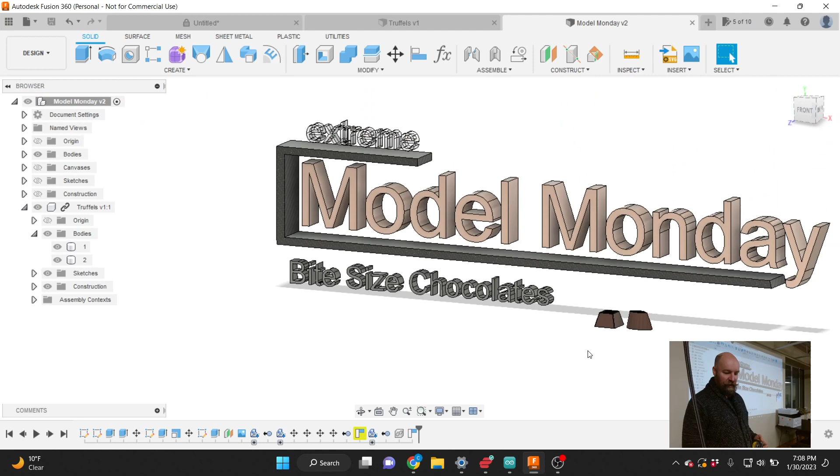Because I know we got some new people here, as an overview of the drawing environment, I'll go over this briefly. We've got a screen that we will fill with models. In the top right-hand corner there is a navigation cube, and if I hover my mouse over it, things turn blue. Anything that turns blue I can click on, and then it just spins around to look at that view.

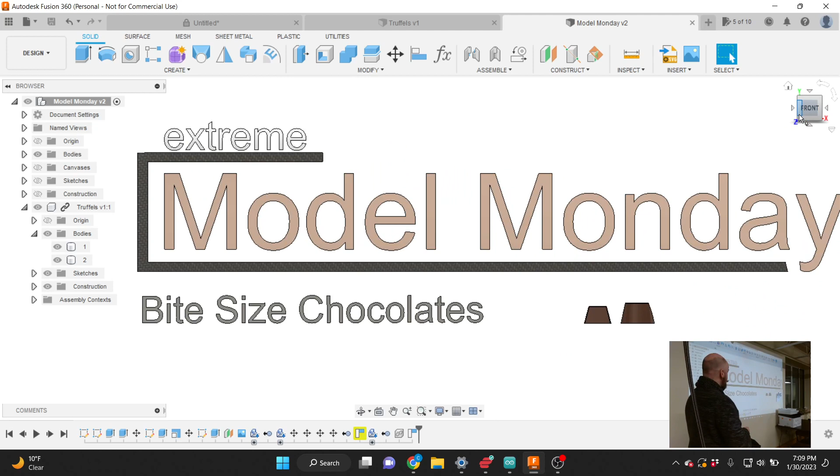I can also click and drag on that navigation cube in the top right-hand corner, and I move around in a little bit more finite way.

Down at the bottom are a handful of tools. I'll be honest, I don't use these tools very often, mostly because the first 5 tools there I can do with just my mouse or the navigation cube.

So this first tool is the orbit tool. This orbit tool does basically the same thing as the navigation cube, so I can click and drag and twist and turn my model around. When I'm done using a tool, I'm currently holding this orbit tool, and if I hit the escape key it'll put it away, and then I can do whatever I want.

I'm not seeing that at the bottom of my screen. You have a blank screen that's not full. Try making it full screen. I bet it's just clipping off. There we go.

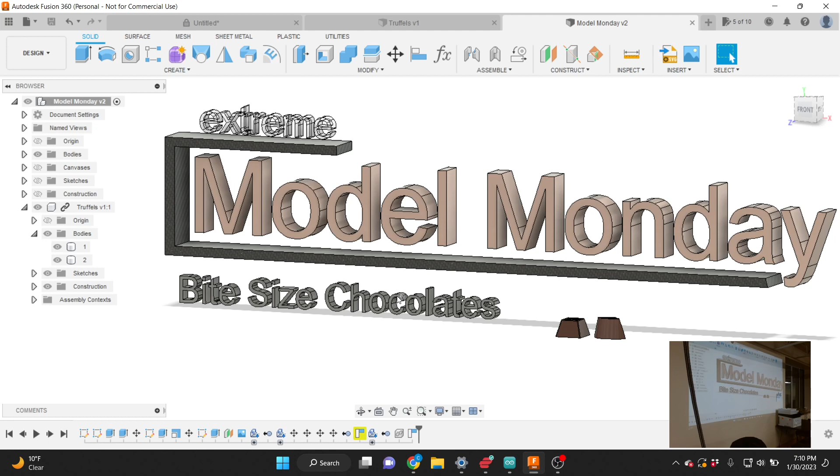Thank you. Hey Carl, would you like a laser pointer instead of your tape measure thingy? Oh, you don't like my tape measure? I feel like I bought a laser pointer. Didn't we get a laser pointer? I don't know if you did, I bought a new one. Yeah, and then we put it right here. I put it and it broke when it got forced in. Okay, so I replaced it.

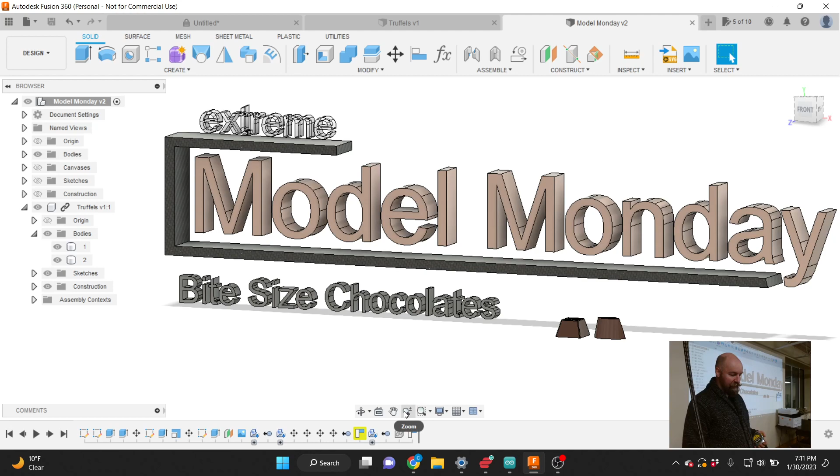The next couple of tools here, there's a hand tool for panning left and right. I just don't find myself doing this very often, but there is a hand tool, you can certainly use it. There is a zoom in and zoom out tool here. I just use on my trackpad, I use 2 fingers to zoom in and zoom out.

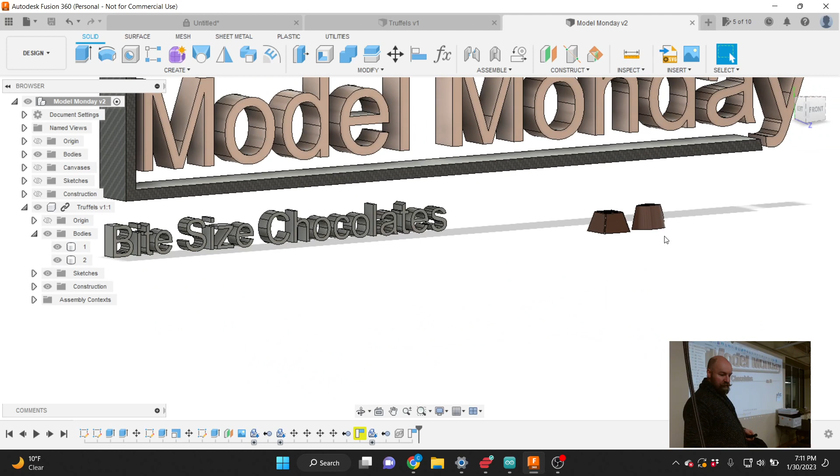And this is the primary way that I navigate around my 3D world. I'll zoom in to an area, twist or turn it to an angle that suits me, and then zoom in and do whatever I need to do. Then I'll zoom out, twist or turn my model to some other area, and zoom in to some other area that I want to do work on. That's kind of how I choose to navigate around the 3D world.

But there's the hand tools and stuff like that. Ooh, that's bright and green and cool. Thank you. Whoa, yeah, now where am I pointing? All right, cool.

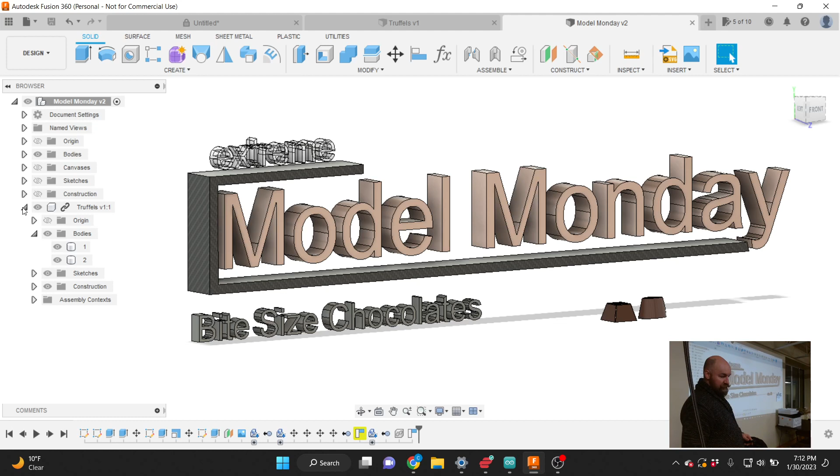As we start to draw things, 2 things will happen. As we start to use these tools up at the top of our screen, 2 things will happen. A is we will have a bunch of folders that start appearing over here, so as we use the Create menu to create sketches, we'll have a Sketches folder that pops up. Inside of that Sketches folder, let me pull up probably a better example. Here we go, our sketches.

All the 2-dimensional sketches that I use to make these objects are here in my Sketches folder, and they appear as we go. As I take those 2-dimensional sketches and make them 3-dimensional, we'll have a Bodies folder that pops up, and that will contain all of the bodies that are part of our sketch. You can see I've done a great job naming my sketches and bodies in this case - that's not always the case, but I encourage people to do so.

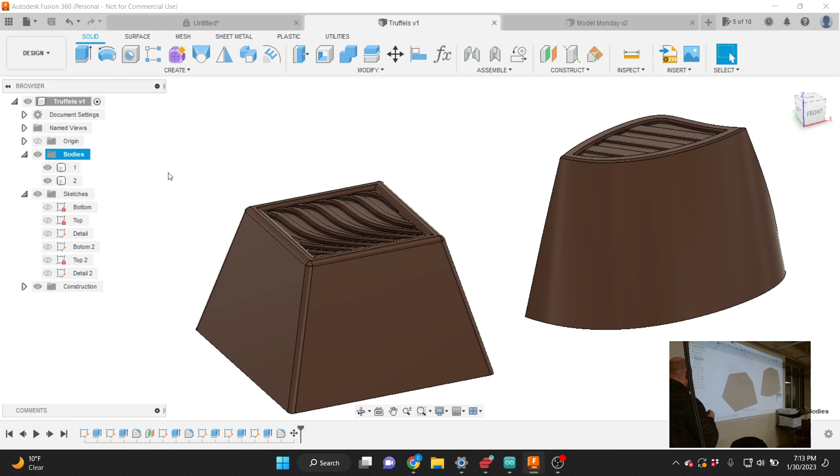The last thing that will change here as we start drawing is down here at the bottom, there's a feature list, or a timeline of steps that I took from when I first started my first sketch to where I am now in the present.

So at any point I can scroll back in time and we can see, oh look, the first two things I did was I made a sketch and then I extruded that sketch. I will show you how to work with that as we actually draw a thing, so let's go ahead and do that.

So I've started a new document. Fusion 360 has a tabbed workspace here, so at the top of the screen there's a whole bunch of tabs. If you just have one document open, you'll just see one tab, but there's a little plus button and you can always open a new document if you would like to. I'm going to put this right here. So in our usual fashion, we are going to start by creating a two-dimensional sketch.

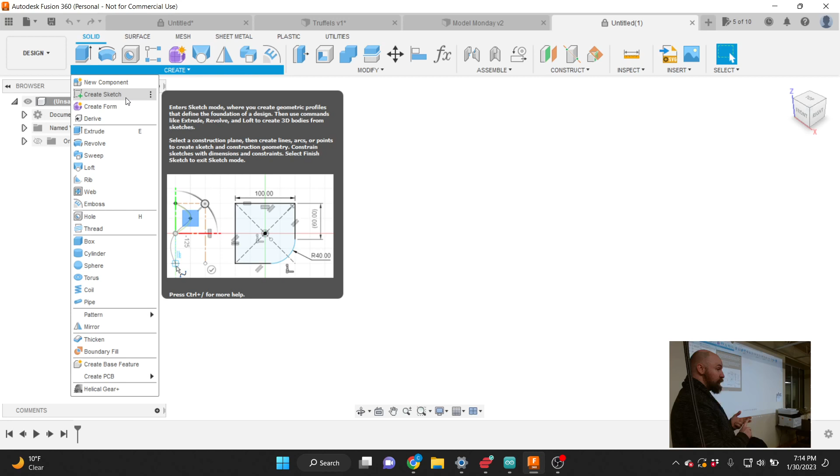Fusion 360 is great because almost everything that you hover over will have a tooltip. So here the tooltip both tells me in the first paragraph what the tool does, and in that second paragraph usually how to use that tool. So we're going to start by creating a two-dimensional sketch here, so I'll click on this Create Sketch icon. And now if I just stop moving my mouse, again, Fusion just tells me what I'm supposed to be doing. So right now I want to select a plane or a planar face.

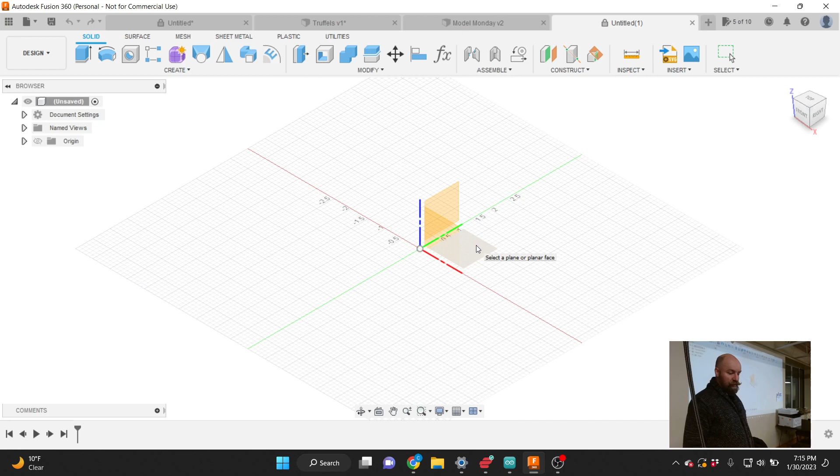And what that means is we've got a three-dimensional world, right? And if we want to draw a two-dimensional thing in that world, we need like an imaginary piece of paper to draw that on. So those three surfaces are our imaginary pieces of paper that it gives us to draw our 2D sketch on. I am going to choose to draw on my top, the plane that faces directly upwards.

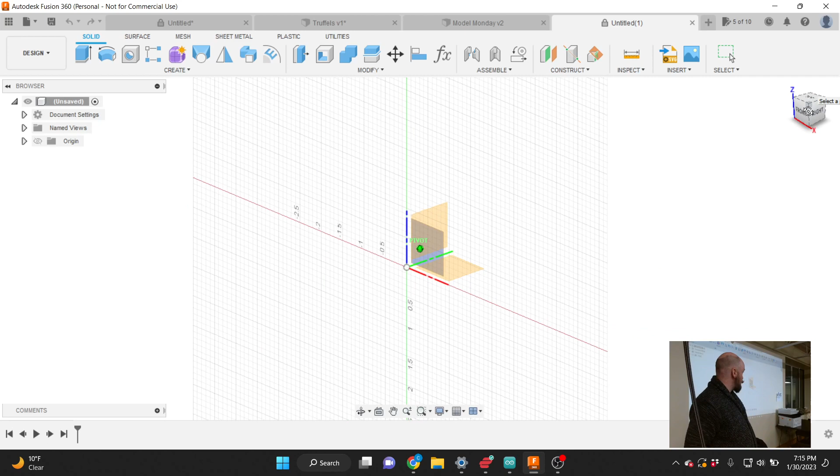And my trick for making sure, because it's really easy to get turned around in the drawing view and not know which way is up when you first start, is I'll use my navigation cube up in the top here, and I'll just go ahead and click on the word top. So now I know I'm looking straight down at that plane, and in order to pick it, I will just click on it. And we should see some grids pop up in front of us.

Happy grids? All right, good. I see happy nodding faces, or astute nodding faces, one of those two things.

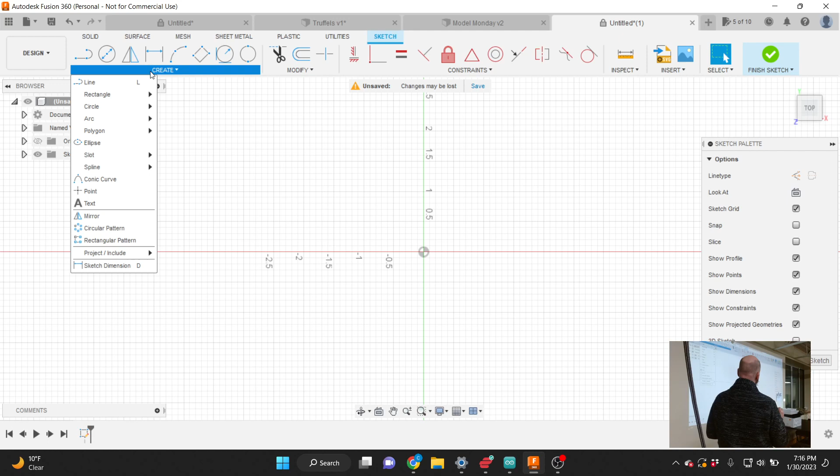All right, so all of our tools for sketching are now right here at the top in our Create menu. So the Create menu kind of changed from the environment that we were just in to the sketching tools now that we are editing a sketch. You'll notice we've got a sketch palette open here. This is a little window with some sketch options in it.

And if we choose from our Create menu to make a rectangle, I'm going to go ahead and choose to make a 2-point rectangle. And now if I just stop moving my mouse again, it says what I'm supposed to do. It says, hey, place the first corner.

As a general rule, I encourage people to have some part of their sketch, when possible, connected to the origin. So, not to get too advanced, sketches are constrained in size and in position. And the only way to constrain your sketch in position initially is to have it connected to the origin. Having your sketch constrained in position will just help you later on down the line.

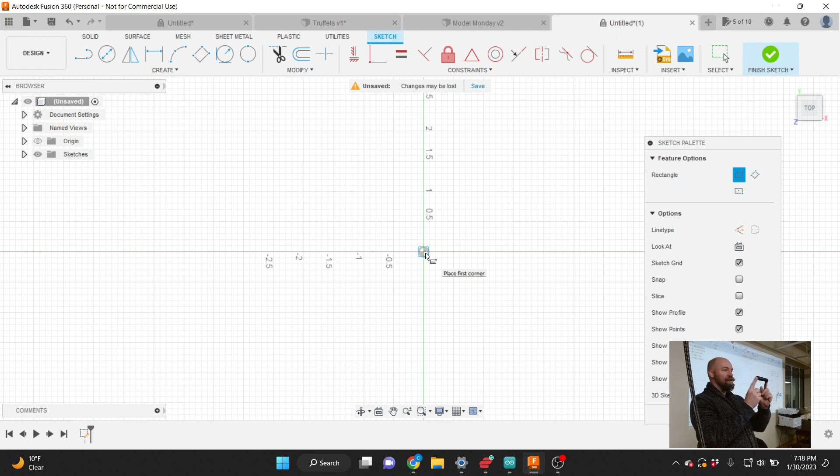Yeah. What does constrained mean? Constrained means - that's a good question - it is nailed, locked down, and defined. So like this pointer is 6 inches. It can't be more than 6 inches. It can't be less than 6 inches. It is a rule that has been given to this pointer, and it can't - well, it could be changed, but I'd have to do fancy things in order to change this. And it's constrained if it's touching the origin. Yeah, it is constrained in position if it's touching the origin. And if it's not, then it's just kind of floating anywhere in space.

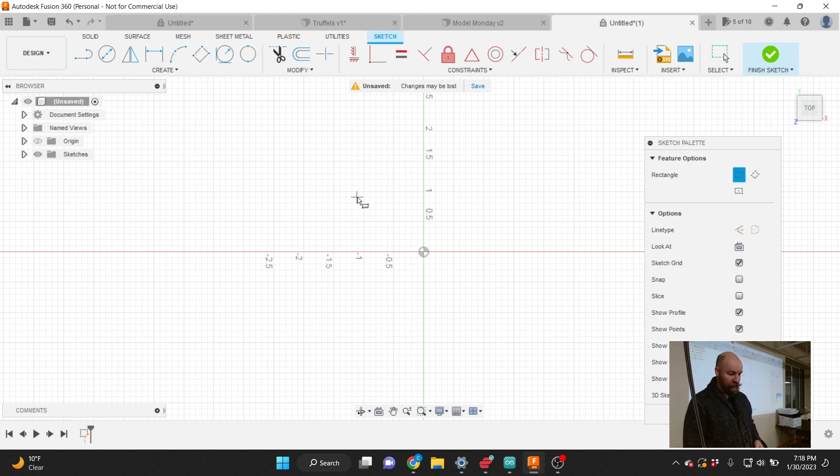Yeah, here, for example, if I just make a rectangle, I can move this around. Now, this is not moving around in a very predictable way because I am not constrained in dimension either. So this is not how I encourage people to make rectangles. But here, if I properly make a rectangle, you can see this line isn't going to move around. It's kind of locked in place. And we want to have things that are kind of locked in place because having them locked in place will make them move in more predictable ways or change in more predictable ways when inevitably we make a change.

All right, so I'm going to click on Create and then Rectangle and then 2-point rectangle here.

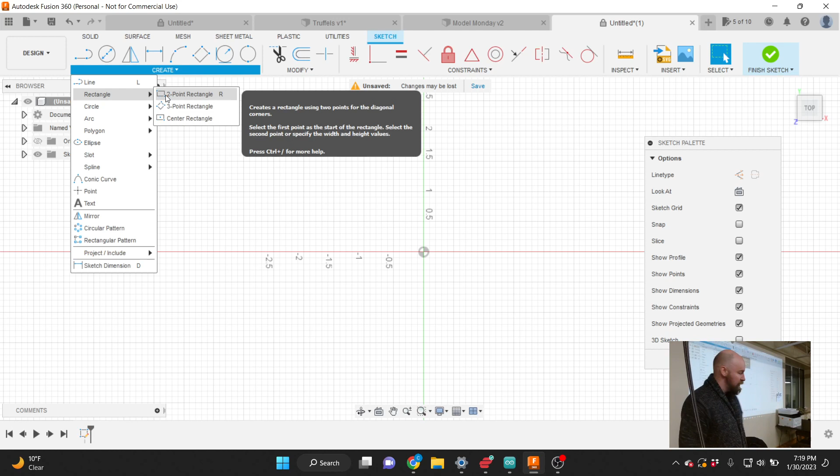As the start point of my rectangle, I'm just going to click one time on that origin. It's a click and move, click release, and then move—not a click and drag. Once you get to the point where you can see magical numbers here, I encourage people to let go of their mouse and embrace the power of the keyboard. Come to the dark side and type in numbers. I feel like a good chocolate size is like 1 inch by 1 inch.

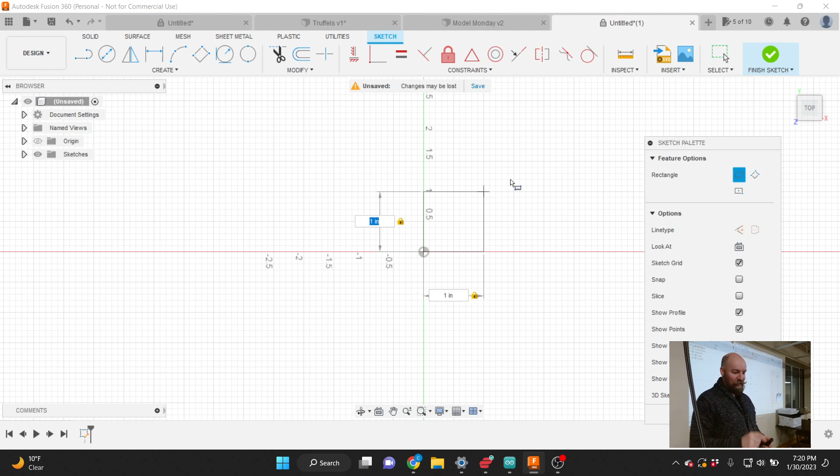That's cool too. You can just type in inches, so you can type in 1, and then if you type in IN, it will do a conversion for you. To get to your other measurement, you hit the tab key, and it will bounce you back and forth between your two measurements. You can just type in 1 followed by IN, or any unit of measurement—1 inch is 2.54 millimeters, or centimeters.

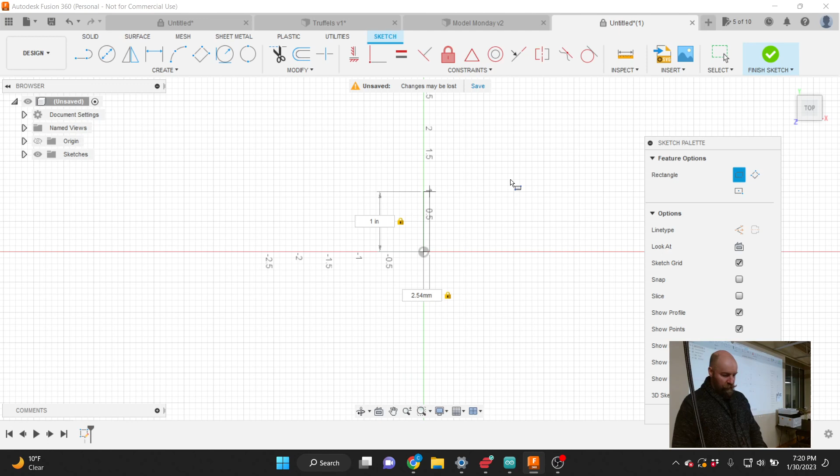So you could just type in 2.54 centimeters if you wanted to. Or if you're making fine German chocolates, maybe 3 centimeters would be a good size for a fine German chocolate. But we're making dirty American chocolate, so we're going to make them in inches.

All right, cool. So now if I hit enter, I have placed my rectangle down here—a special kind of rectangle that is a square.

Ooh. So, to change over our document units here to draw in freedom units, I tend to think in freedom units—it's not my fault, I was raised by the public school system.

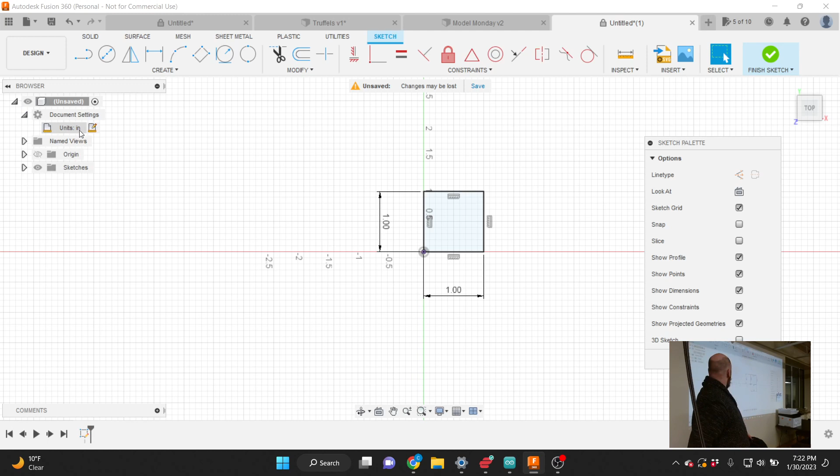To change our units in the document settings, over in our browser on the left-hand side of the screen, there's a little document settings triangle you can spin down. If you hover over units, there's a little icon that appears right next to it, and we can change our active units to inches. There's a checkbox where you can make it the default if you'd like—it's actually the icon on the other side there. There you go, and then there's a window for you. You can make it your default. Unless you just want to do the conversion in your head or make Fusion do it for you, I support your choices. You can use the measurement system that feels right, deep down in your soul.

All right, cool. Now that we're all drawing in inches, we can finish our sketch. We're done making the sketch here—we've made a square.

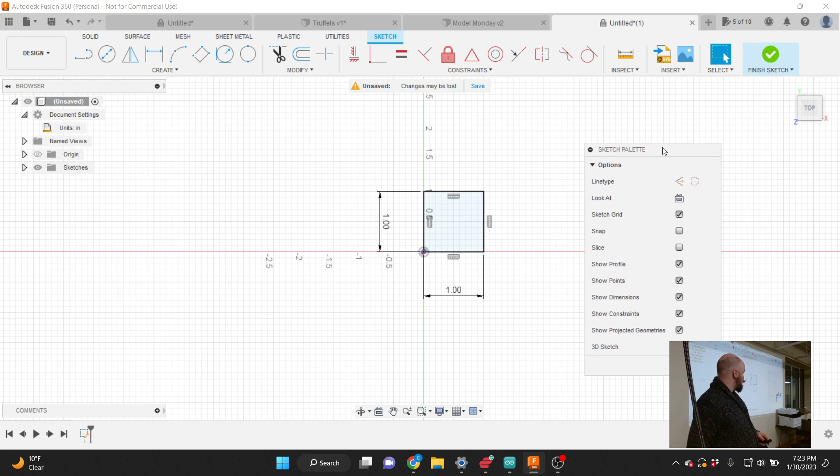In order to finish a sketch, there are two ways to do it. There's a finish sketch icon in the top right-hand corner of the screen, a little green checkbox. The other way is on our sketch palette—there's a finish sketch button at the bottom of that palette. Either way you want to do that is just fine.

Once you click that button, all your measurements go away, and you should immediately freak out and start all over. No—so we don't have measurements viewable because right now we're no longer editing that sketch. We're no longer creating it. The measurements are only viewable when you're editing that sketch.

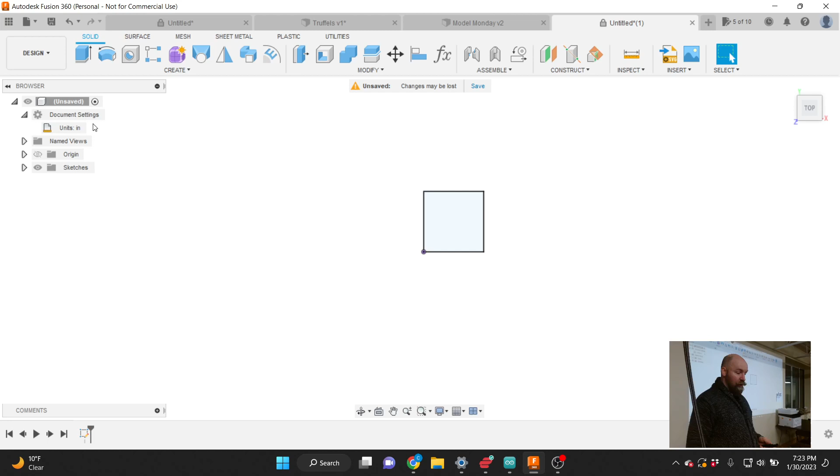Where does edit come in? Once you've created a sketch and want to edit it, in our sketches folder here, we now have a sketches folder with a sketch in it called Sketch 1. I highly encourage people to name their sketches, name their bodies, name everything. This is the bottom of our chocolate—anything is better than Sketch 1. To name it, you click, pause, and then click again, and then you can rename it.

If we wanted to edit that sketch, there are two ways to do it. In that sketches folder, I could right-click on the sketch and choose Edit Sketch. Or down in our timeline at the bottom of the screen, we've got our first icon that has appeared—I can right-click on that little icon and choose Edit Sketch from there. Either way would take me right back to where I created that sketch.

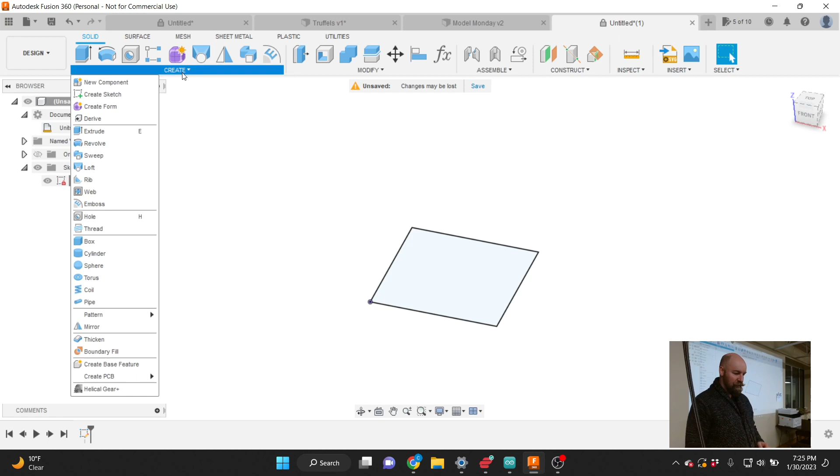Let us make a shape, a chocolate shape. The best kind of shape that there is. One that is made of rich, dark chocolate, extruded from the finest cocoa beans, hand-picked from Guatemalan hillsides. I don't know where you get chocolate from. I'm just a dumb white guy.

So we're going to use the extrude tool here. In the Create menu, you'll find a whole bunch of different tools. Most of these are broken up into sections. This top section, or second section, is what you'll use to interact with the sketches we made.

This next section is for making modifications to a 3D object. This next section is for making 3D objects without making a sketch first. A lot of people like that route, but I like to make sketches first. I leave it up to your own choices. Because Fusion is so great with tooltips, if you want to make a box instead, you can use the tooltips to figure out how.

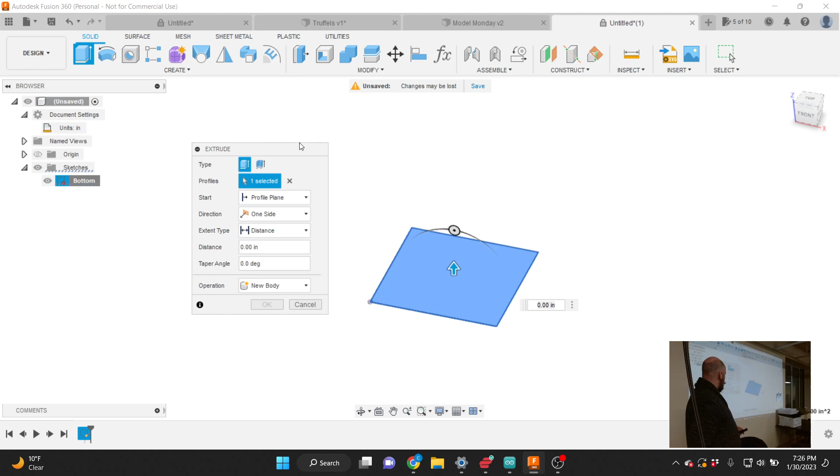But we are going to extrude. The item we are going to extrude is our little square that we made. If you're looking at your square kind of straight down, it's hard to see. Why does my square keep disappearing?

You're editing a sketch right now, so click Finish Sketch. There we go, now you're sketching. Now there's your square, okay.

In the Create menu, click and drag the arrow, or you can type it, and grab the extrude tool. Now click on your square. Now you're at the point where I'm at - both of us looking straight down at our square. I'm going to use my navigation cube in the top right-hand corner to look at it in a more three-dimensional way. Now I can see a little blue arrow there.

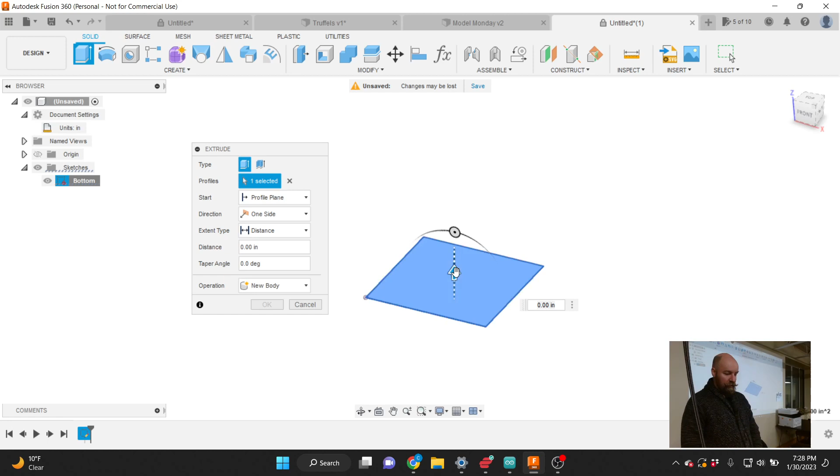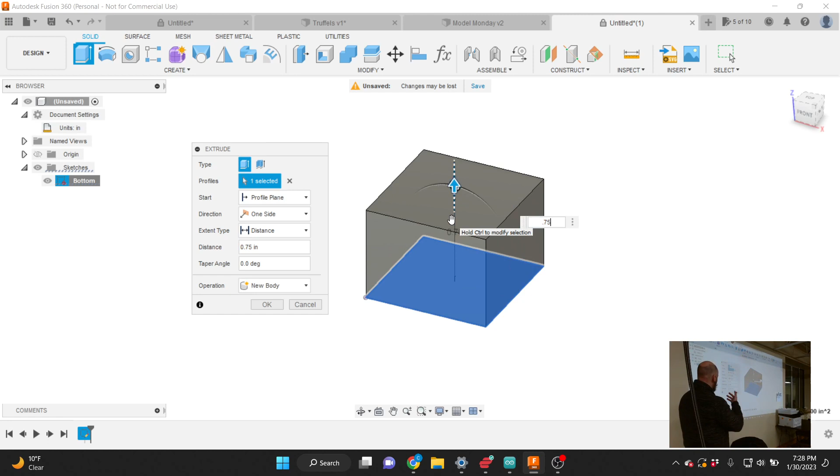I can click and drag on that arrow, and some numbers start appearing, along with a small shape. I am going to make this chocolate 3/4 of an inch tall. I can type in 0.75, or I can type in 3/4, and it will change my distance here to 3/4 of 1 inch.

Click edit the feature so you can go back - let's say you want a 3/4 inch extrusion. Now this is close to what we want here.

Because I want to make this chocolate in a mold, I need to have something called a draft angle. If you have a cube coming out of your mold with sidewalls straight up and down, it's going to be very difficult to remove that object because your sidewalls are rubbing up against your object the whole way.

So what we're going to do, both for molding purposes and to make it look cool, is add a taper angle to our extrusion. In the extrude dialog box, I'll give it a taper angle - if I type in negative 10 degrees, that seems like a nice taper. For mold release purposes we probably only need 2 degrees at most, but 10 degrees makes it look cool.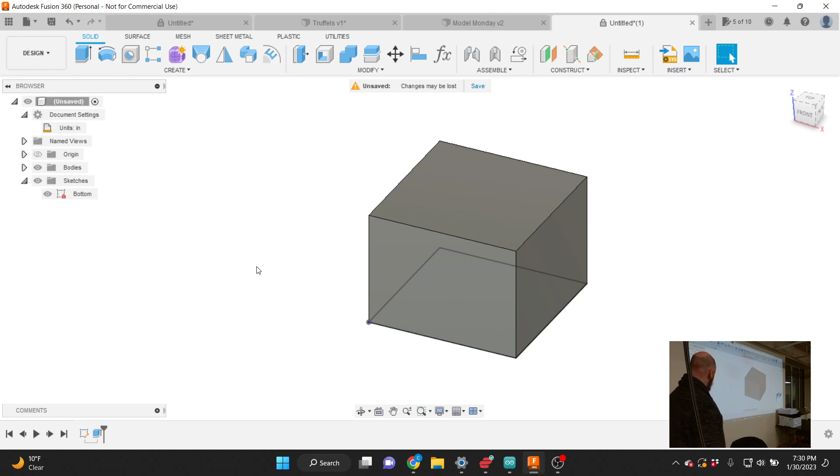If I hit enter, I don't have my taper going on here. I go, oh, I want to change something about the way my extrude looks. Just like our sketch appeared down here in our timeline, we have an extrude icon that has appeared down here as well. And just like our sketch, anything in our timeline, if we right click on it, we could say edit feature.

And now we go back to where we were making that extrusion, and I could change the distance, or in our case right now, what I want to do is add a taper angle. So I want to give it a taper of negative 10 degrees.

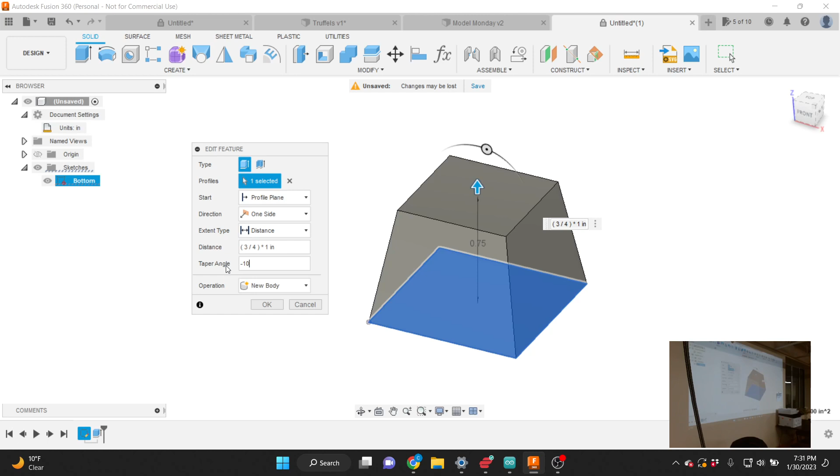Oh, okay. Click cancel, try it again. Oh, cool, all right, it fears my power. Yep, you know, sometimes when I just look at the fusion, it goes, oh, sorry Carl. Yeah, select the one, surprising about something that looks just like that. Yeah, okay good, all right perfect. So now, then you hit OK. Yeah, then we can hit OK. Yeah, yeah, you start clicking. I tend to click before I know what I'm doing. That's all right, that's all right. Yeah, very common for people to be excited and like, look, I'm in shape.

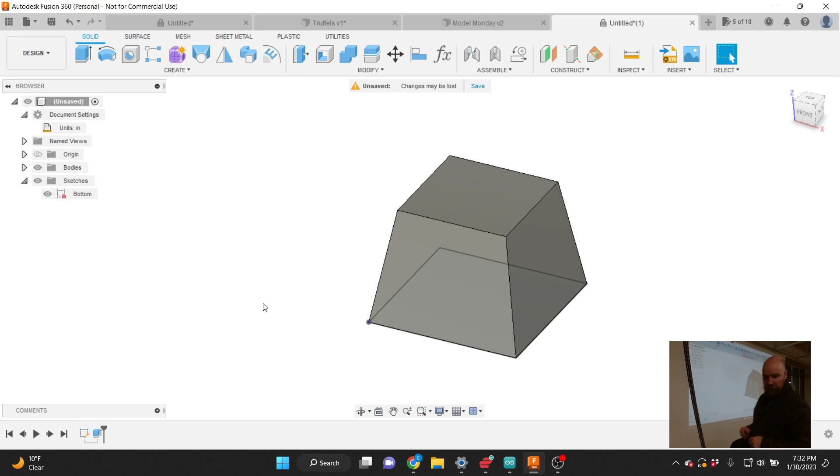3 edges, all right. I don't see that the hidden back lines though. Yeah, it's opaque for me as well, good point. All right, so this is the one thing that I've changed from the default that Fusion 360 automatically does, and I decided I don't like it. So what you're seeing is not the back edge of my shape, it's actually my sketch.

The default here is the first time you use Fusion 360, or the first time you extrude something from a sketch, it turns off the visibility on the sketch for you. I've changed that setting because I think it's annoying, because oftentimes I will draw multiple things on one sketch and then extrude many things from it. So I've changed that preference. Just know that you can hide or show a sketch, and I'll show you preferences after class if somebody really wants to know where that is.

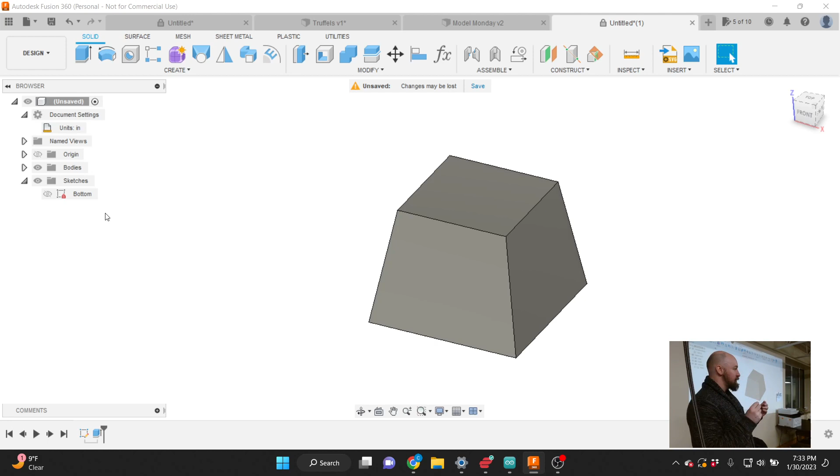All right, cool, so we've got the beginnings of a chocolate. What I'd really like to do is add a little detail to the top of our chocolate. So a little recessed area, and maybe a wavy pattern or polka dots or something like that, just to give our chocolate some character.

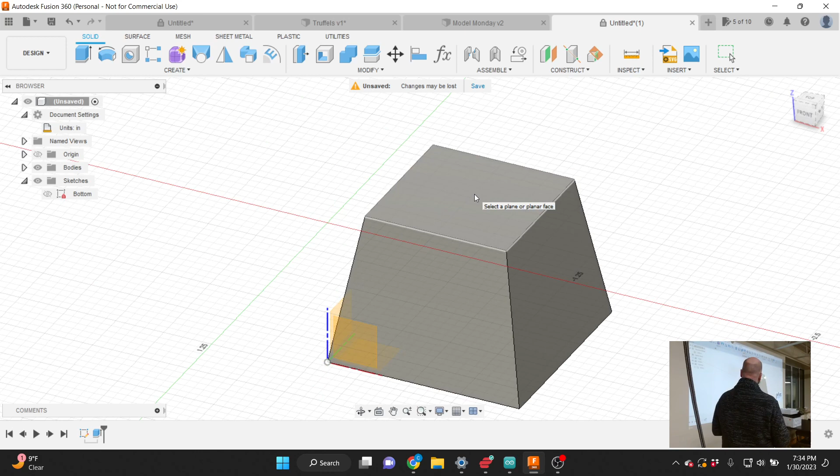From our create menu, I'm going to go ahead and choose to create another sketch. Now, in addition to those 3 drawing surfaces we had initially, which are still here, I can draw on any flat surface. So this flat surface here is the one I want to draw on. It's the top of my little chocolate, so I can create a sketch right on the top of that chocolate.

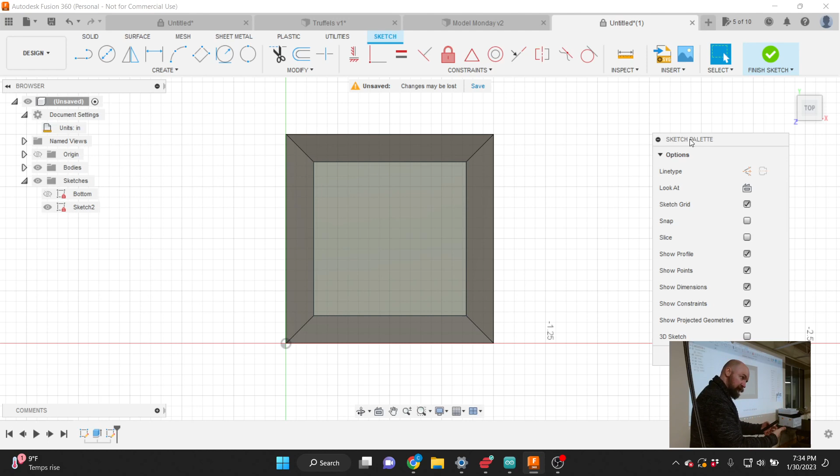When I click on that face, I spin around so I'm looking right at it. Does it automatically? It does, yeah, it twists that view around automatically so you can look right at whatever 2-dimensional surface you've chosen, so you're normal to the surface you're looking at. I can still move my view while I'm in a sketch, using my navigation cube in the top right-hand corner, to twist or turn around my view. I don't always—sometimes it's useful in a 3D environment to see where you're at, but normally it's best closer in.

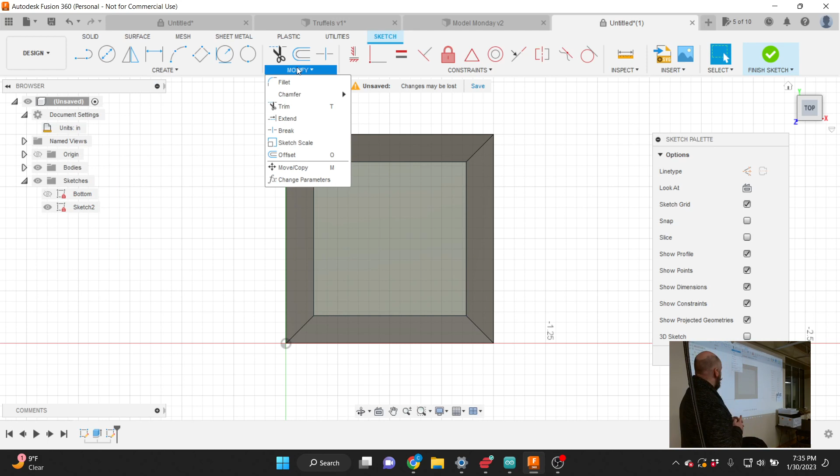All right. In the Create menu are all the tools for creating 2-dimensional lines and sketches. In the Modify menu are some tools for modifying those lines and sketches that you made. And one of the tools here is the Offset tool.

If we choose this Offset tool and hover our mouse over the outside edge of the top of our little chocolate, it turns blue, and I can click on it. Now I've got a little double arrow or double triangle thing I can move around, moving a little red line. For me, making it a negative number goes inside of my box, and that's what I want to do—I want a little offset square inside of my box, and I'm going to make it negative 0.05, just a small little recess there. Then I'm going to click on OK.

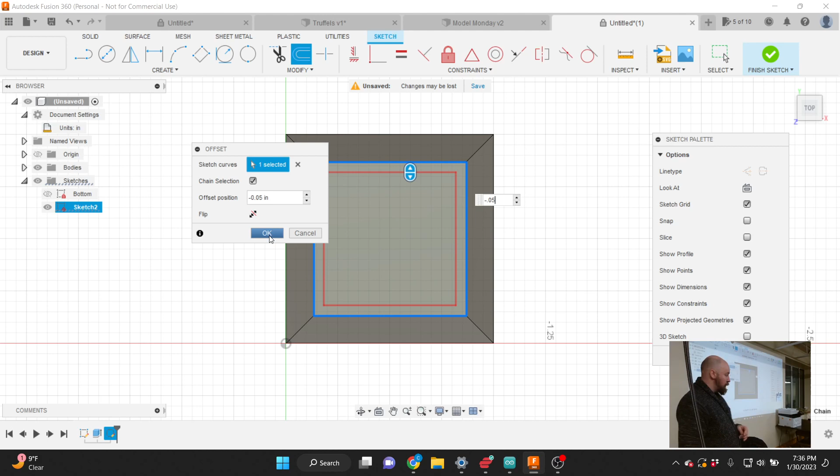All right, so now I am done making this little sketch here. I'm going to go ahead and click on the Finish Sketch button on my sketch palette.

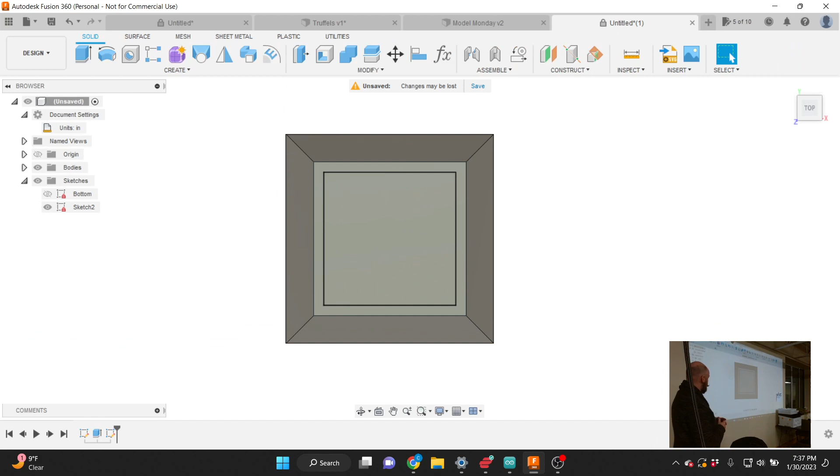If I wanted to change that offset dimension after I've done it and it doesn't look right, I can come back here to edit my sketch. My offset number has appeared right here - this is just a dimension placed in here. I can move it anywhere that's easier for me to see. To change it, you just double click on it, and you can change it to whatever looks the tastiest.

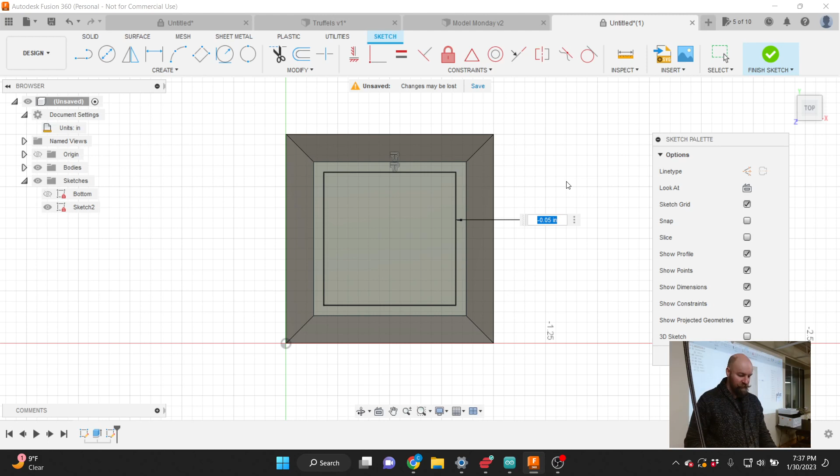So this sketch now is just a square containing a smaller square. Great, very meta. We only draw squares in Model Monday - square only, we're a square only kind of institution. It's hip to be square and stuff.

Now, how did you get to change the name? If you click on the word one time, pause, and then click a second time, it should highlight all blue, and then you can change it to whatever you want. The best top ever.

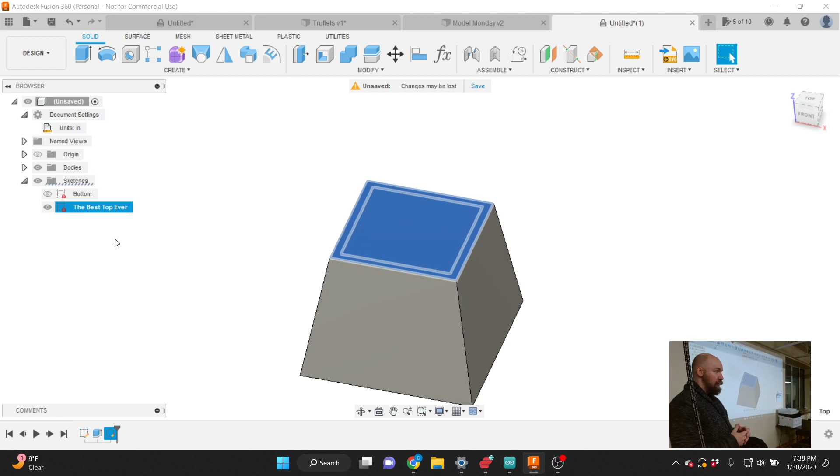Modesty. You might have to finish your sketch first before you can change the name. I just erased it somehow - I hit this thing here and it disappeared. Try clicking on finish sketch. Oh, there you go.

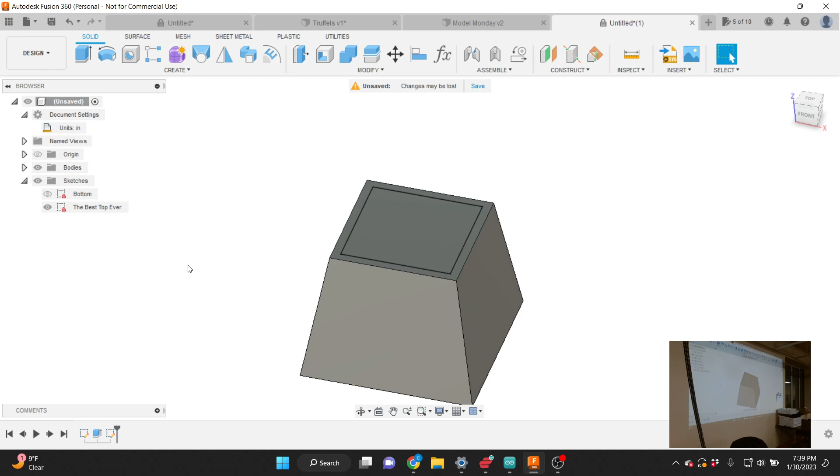Cool, so if I went back here, there you go - try, you gotta click one more time. Okay, what did you call it? I called mine top. I called mine the best top ever. But top is good. Too quick to hit buttons.

So now the next thing we're gonna do is I'm gonna go back to the extrude tool. If we click on create and then come down to extrude, that's the same extrude tool we used the first time to make our chocolate shape.

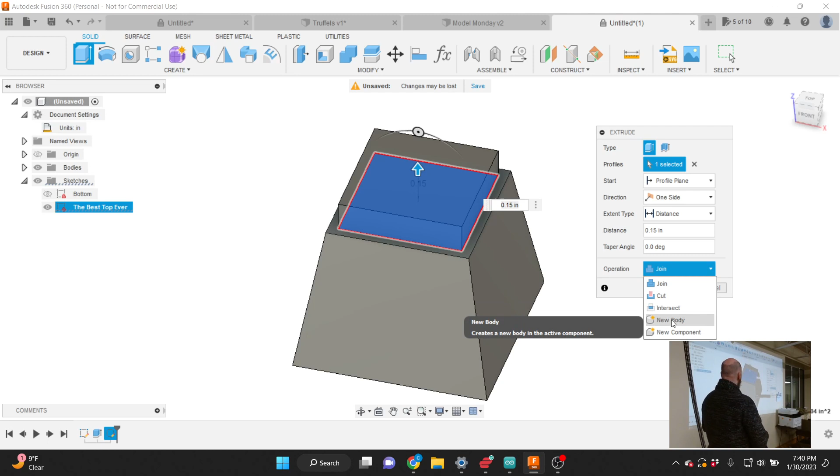I'm gonna choose as the profile that I'm going to extrude that little inset square that we made. Now, something I didn't point out the first time around is we have an option in our extrude dialog box called operation. The first time we extruded something, the operation was set to new body, so it was making a brand new body because we didn't have any bodies to do anything else with - it was the first body we made.

This second time using the extrude tool, if I click on this blue arrow and pull it up, the default operation here is set to join - it's saying, hey, obviously you want to join these items together. If I move the arrow the other direction, down into my cube, you can see I'm going into it, then it turns red, and my default operation changes to cut. This is indeed what we want to do.

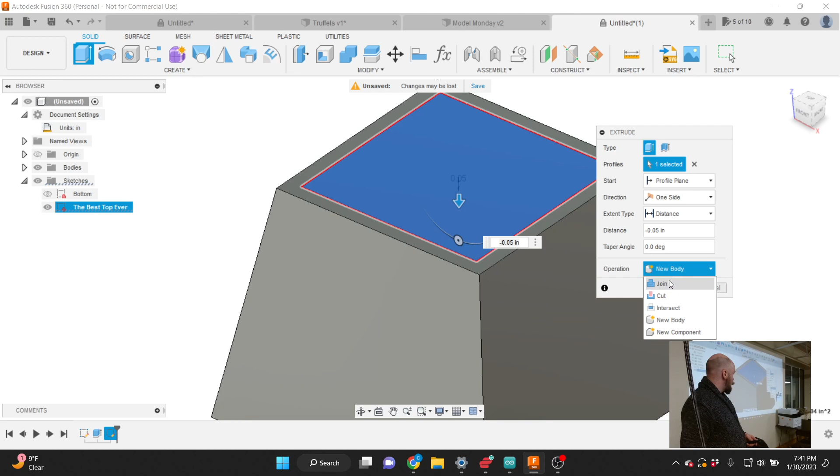But just know that you don't have to use those default operations. You could change it to join if for some reason you wanted to do that, or make it a brand new body. But we do indeed want to cut out a little recess in the top of our chocolate.

So if I say OK, that is exactly what it'll do - it'll make a little recessed hole, a little recessed bit there. It doesn't need to go down very far, just a little bit. It's fine, cool, sweet recesses, bruh. All right, cool.

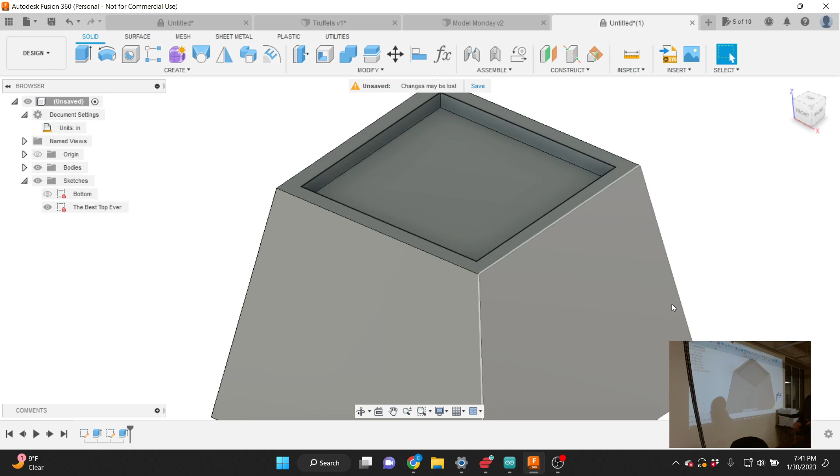So now what I'd like to do is clean up our edges here a little bit. Chocolates don't have a lot of sharp edges - in fact, the world does not have a lot of sharp edges. So I'd like to add some fillets to our chocolate bit here, and I'm going to do that in the modify menu. The second option from the top is called the fillet option, also the F key on the keyboard, for those of you who love keyboard shortcuts.

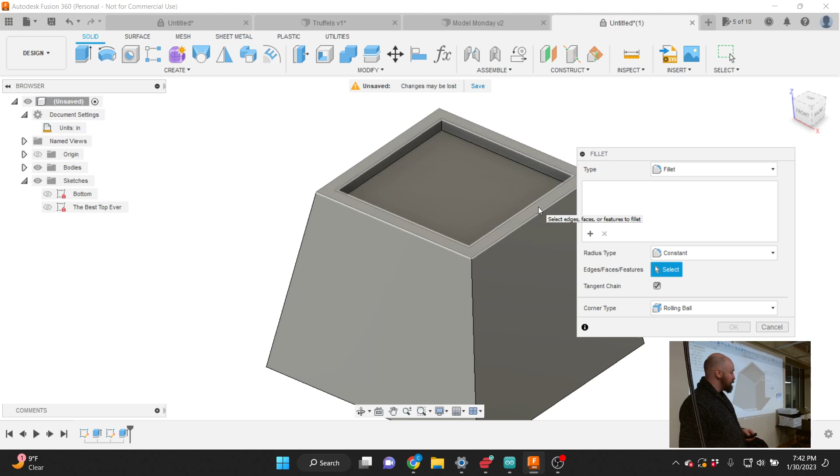There are two different ways that I can use this fillet tool. I can pick on faces - if I pick a face with the fillet tool, it'll add a fillet to every edge that face touches. So that's an option here. I really want to put a round over on both of these edges, so I'm going to pick that face as my selection option.

And then the other way to use the fillet tool is you can pick on individual lines. So I'm going to pick on the four individual lines that are vertical on my little chocolate cube here.

Chocolate rhombus. Is it a rhombus if it's a cube? It definitely doesn't have 90-degree angles. Or is this just like a parallelogram? Trapezoid? Yeah, there you go.

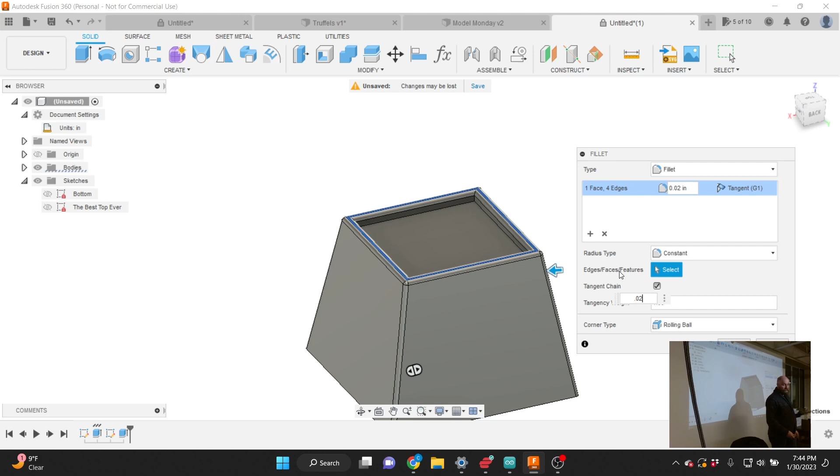Thank you. All right, I'm going to give it a dimension here. Like 0.05? Nope, way too much. 0.02. If you try to type in a fillet that's bigger, Fusion will just swear at you and say nope, can't do it, because the radius of the fillet cannot be wider than any of your faces. Since our faces were 0.05, probably the biggest fillet it'll let me do is 0.25, 0.025. If I try 0.026... oh, that's interesting. 0.028 for some reason it tells me to go away.

How do you get it to do the whole top surface? So instead of picking the edge, if you choose the face, you might have to zoom in. That's interesting. Well, I'll let you choose a face, try it again. Oh, there you go. Okay, so now I can go into the modify mode, fillet, there we go.

Type in 0.05, 0.02, 0.02. There we go. Cool. Filleted edges? No, not okay. Cool.

Hit the little X button, it'll get rid of all the selections you have. Try just doing the top face. You've already got it open here. So if you hit the plus button and zoom in, you can see it a little bit easier. Try just doing that as like 0.02. There we go, it'll do that.

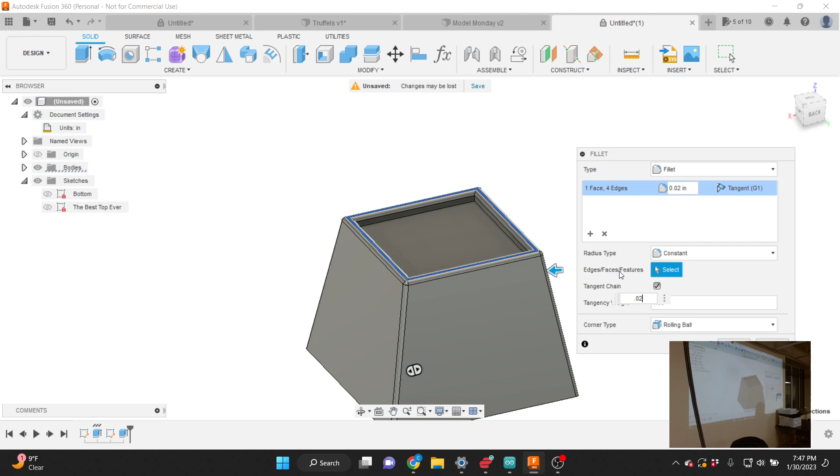So like we had that problem just in the back there, I selected the individual ones. All right, so I'm going to go ahead and click on OK here. But Carl's better at this.

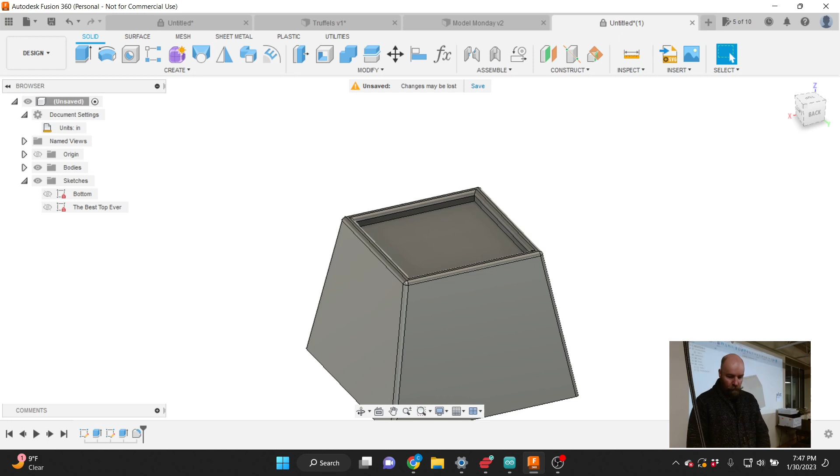And now the last thing we have to do for our chocolate is give it a little design in the middle there. So the way that I'm going to do that is I'm going to come up and we're going to create a new sketch again. I'm going to click on the create menu.

Now something that's kind of important here: if I have all my sketches on, what I really want to be able to do is click on the face that exists in the recess, that recessed face there. You'll find that hard to do if your sketches are turned on. So here's an occasion where it's handy to turn off that sketch.

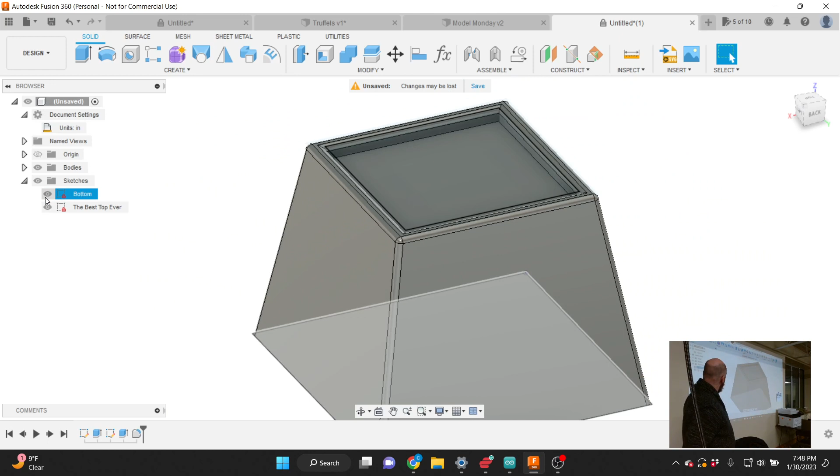So my sketch that I called the best top ever - you may have just called it top - if I turn that off, now it's really easy for me to select that face that exists in the inside there. So turning off that visibility, remembering that there's like a stack of things in front of you, a three-dimensional world right in front of you.

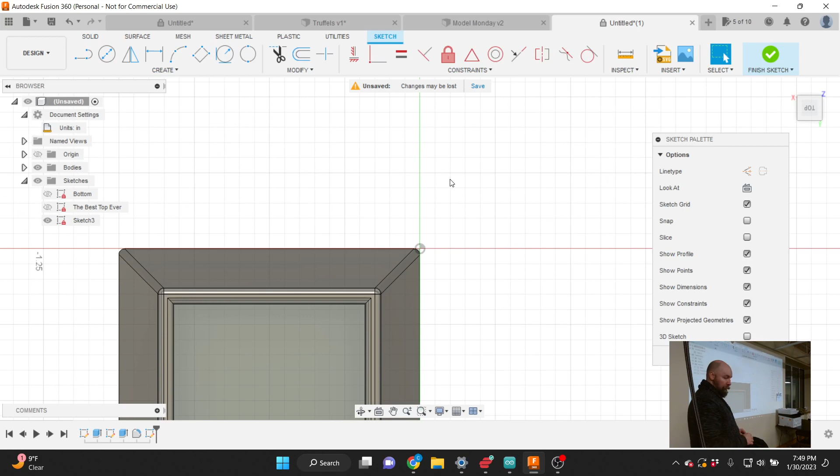All right, so now I'm going to click on the Create menu. I'm going to choose to create a sketch. I'm going to pick that little interior face that I just talked about to create my sketch on. And on this little interior face, I'd like to make some wavy lines. That's what I'm going with. I saw some chocolates that had wavy lines on the top, and I went, that's a chocolate for me. That's my kind of chocolate.

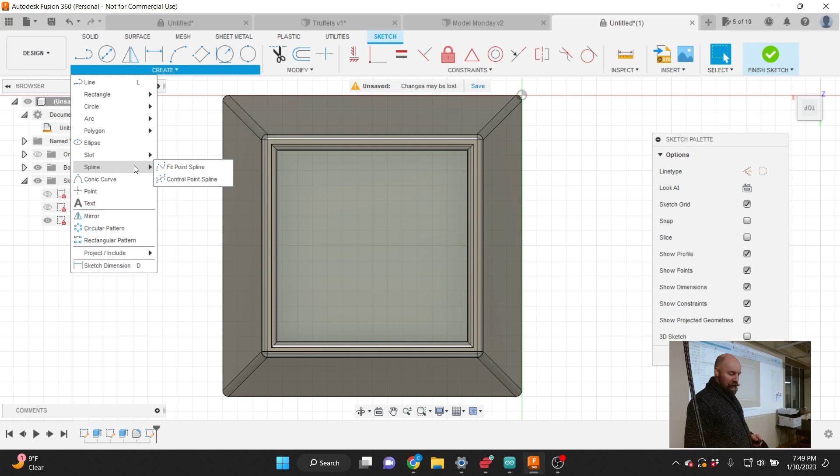So from our Create menu, I think the best way to make a little wavy line is using probably the most complicated tool in the sketching environment, the spline tool. I tend to only use fit point splines. Control point splines are kind of weird, so fit point splines.

If I hover over the edge of my interior face, I get a little blue X that appears and I snap to it. That's telling me I'm connecting to that line there. So I want to make sure I'm connecting to that line, and I'm just going to draw...

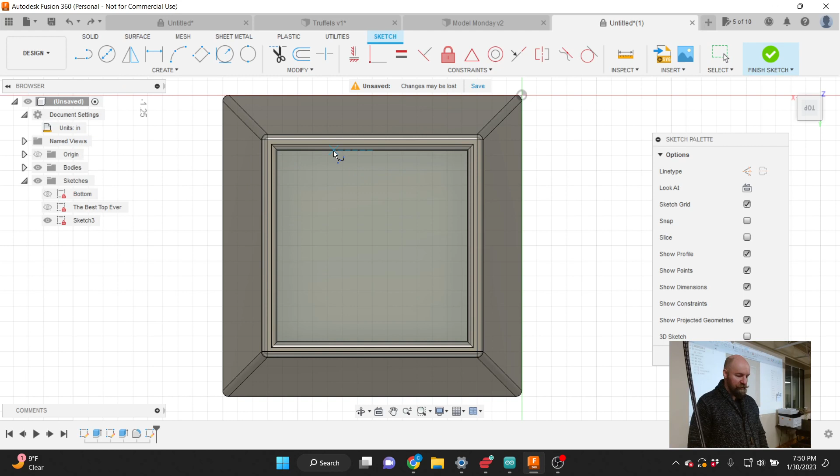Some sort of little wave here. Then I'll hit the little green checkbox to finish that. I'll do that one more time since I did it quickly. So click on the Create menu, choose Spline, then Fit Point Spline, and place the first point up at the top edge of my box.

I don't have a spline in Create—I'm missing something. First, create a sketch. There we go. Now you can click on that little interior face there. Now go to Create, and your spline tool will be there. Spline, then Fit Point Spline. There we go. Cool.

Your wave shape is up to you—I leave the kind of wave you want to make in your own control. Let me just suggest that less is more. So if you have a wave with 32 points in it, less is more. That's what I'm saying—your chocolates won't taste as good as mine, because that's how physics works.

Okay, cool, so I'm going to click and place the last point of my line. Now to finish making my spline, there's a little checkbox down here. If I hover over that checkbox, it turns green and I get the little hand tool, so I can click on this green checkbox to finish my spline. Oh, you might be able to push enter. I know escape does not work—escape works when you're using the line tool, but not the spline tool.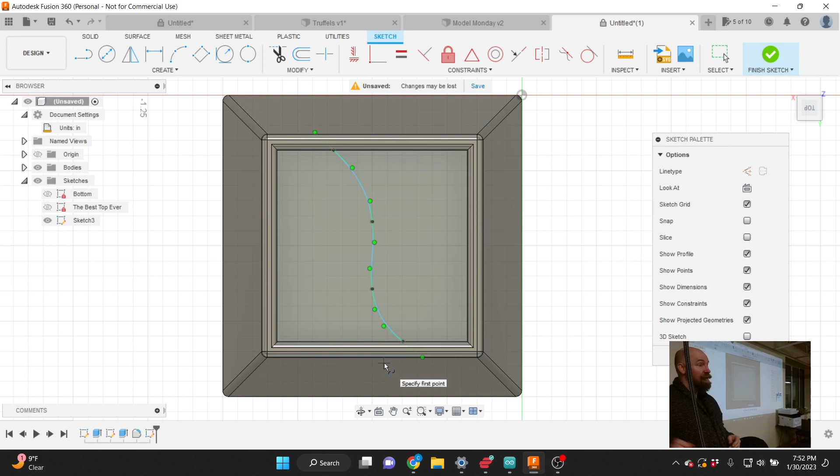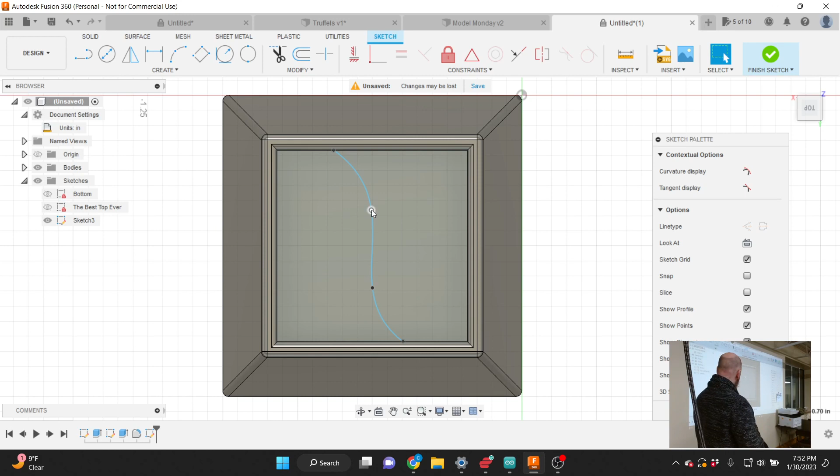So, I've got little control points and I can tweak and move these around if I want to. But what I really want to do is make a whole series of these, and I'd like them all to be completely identical with each other. The way I'm going to do that is not by drawing them all by hand individually with the spline tool.

In the Create menu there is an option called Rectangular Pattern. If we choose this Rectangular Pattern option, I can pick the little spline I made as the object I want to make a pattern of. From the Create menu, I choose Rectangular Pattern, and the object I'm going to make a pattern of is that little spline line I had right there.

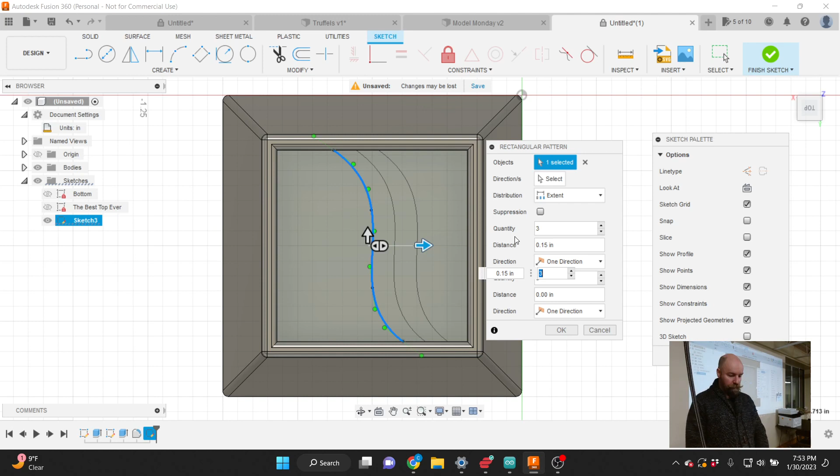Now I've got a little arrow that I can click and drag out. I'd actually like to make this pattern symmetrically from the center, spreading out symmetrically. We can do that with one of the options in the Rectangular Pattern window—I can change this direction from one direction to symmetric.

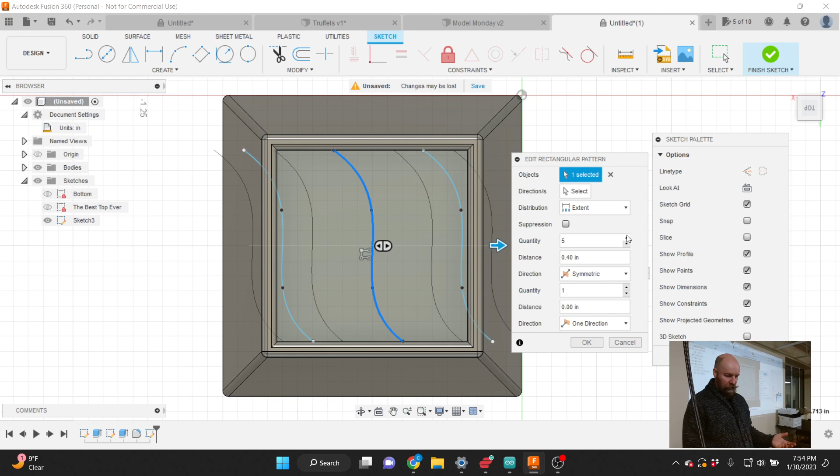Then I can drag out my little pattern to be as wide as I want. Oh boy, I must have clicked OK. I can drag out this thing so it extends out past the lines there. I'm going to add multiple waves here, like 12—12 looks good to me, a whole bunch of waves. You can have as many or as few waves on your thing as you want.

They don't necessarily need to go—that's a nice wave, actually, very nice wave. Cool. Okay, I got a different one. Actually, I like that a lot. That's super cool, you should roll with that. Okay, yeah, I didn't get the full screen that you got though. Yeah, I got like a much smaller one.

You've got two quantities there—hold down, I got two more on quantities, the side, you got two lines, you can change it to more. So you've got a quantity here and a quantity there. Technically this is a rectangular pattern, so it's for making a pattern in two directions, but we're only using one direction in this pattern, so I should change that to one. I think it's the other one you want to change. Okay, let's go with just the one then. I tend to talk to myself—that's all right.

There you go. Now, how do we constrain it to within the edges? Well, you'll make them go out past the edges. If you want waves from beginning to end, you can just make it extend out past, and you may have to drag your arrow.

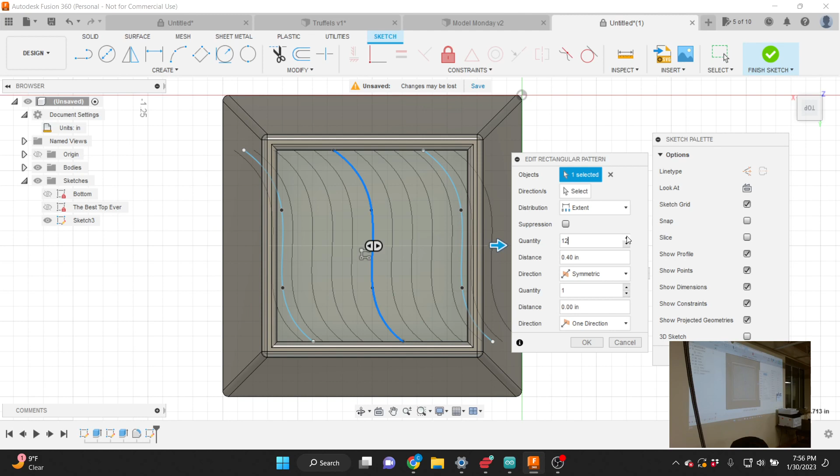There you go. You can't constrain it to the square, so we'll leave it outside the square, and that will be totally fine. Then when we go to extrude these bits, which is our next step, I'm going to click OK for my pattern.

Now I'm going to finish this sketch, so in my sketch palette I'll click the Finish Sketch icon. Now I've got a sketch to name. This sketch labeled Sketch 3, I'm going to call my details, or my little detaily, or you can call it waves, whatever you want.

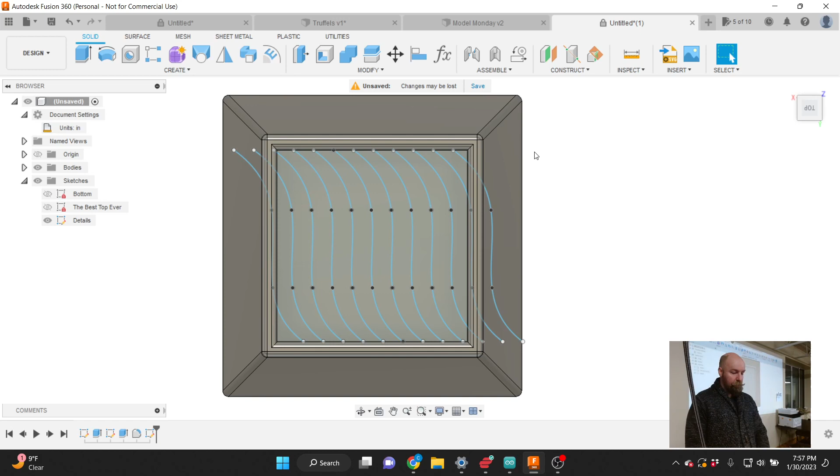Now if I look at this in a more three-dimensional way, choosing the extrude option from our Create menu one last time, I'm going to pick every other wave, from right to left, and extrude that up until just before my curve, or just before my fillet.

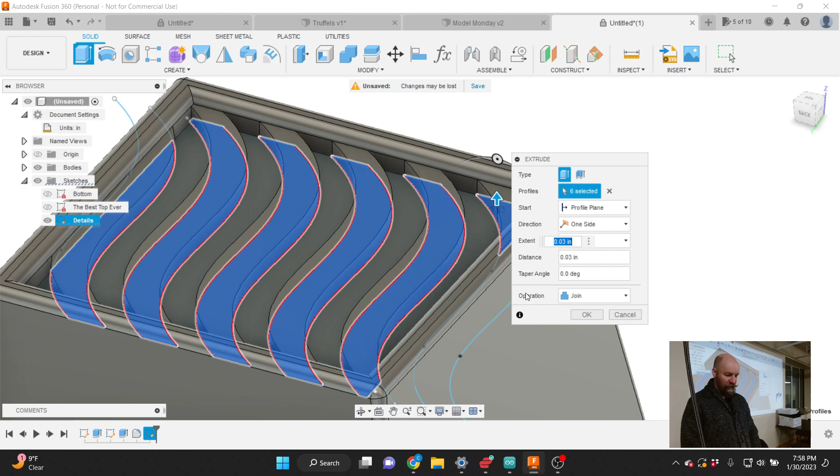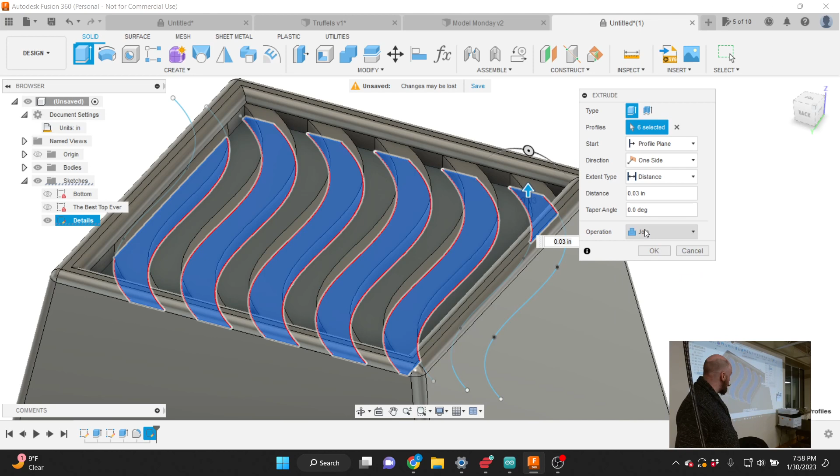Because I'm extruding this up and the extrusion directly intersects with another three-dimensional body, the operation here—like before we chose to do a cut operation—this time we are doing a join operation, joining all these bodies we're extruding to our chocolate body.

And then I'll just say okay, and I'll hide the visibility on that sketch. And there we have it. There is our tiny little chocolate. The little chocolate.

Yep, I like just a couple of waves too. I think that's a cool decision. Did you do a taper angle for this one? I did not, but we probably should have, honestly.

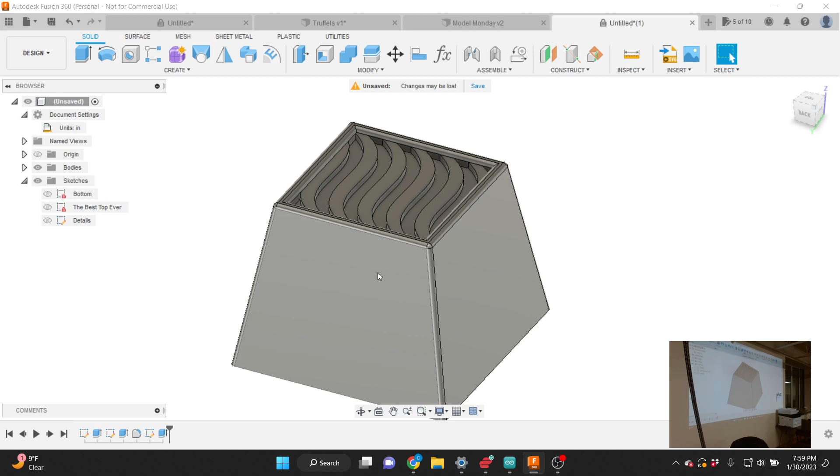Maybe not, honestly. I don't think the vacuum former is going to get into those little details. When I go to vacuum form this, I don't think it's going to vacuum form in there very well.

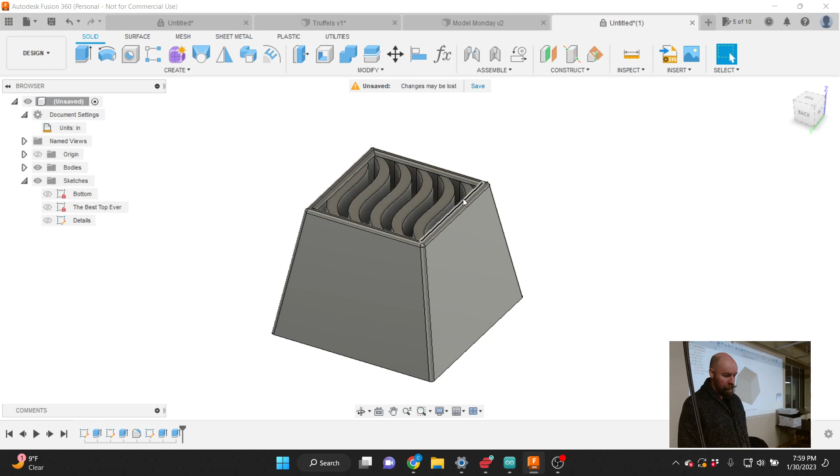As a side note, what I'm considering doing when I vacuum form this is I might actually print something that looks more like this, where I take the bits of the wave I did not pull up and cut them down through my entire shape, so my chocolate has a bunch of holes in it. The reason I might experiment with this is the vacuum then has a way to suck that part of the plastic into those nooks and crannies and crevices. If air can get in there, it might be able to pull that melted plastic down in there slightly. So that's something I'm going to try.

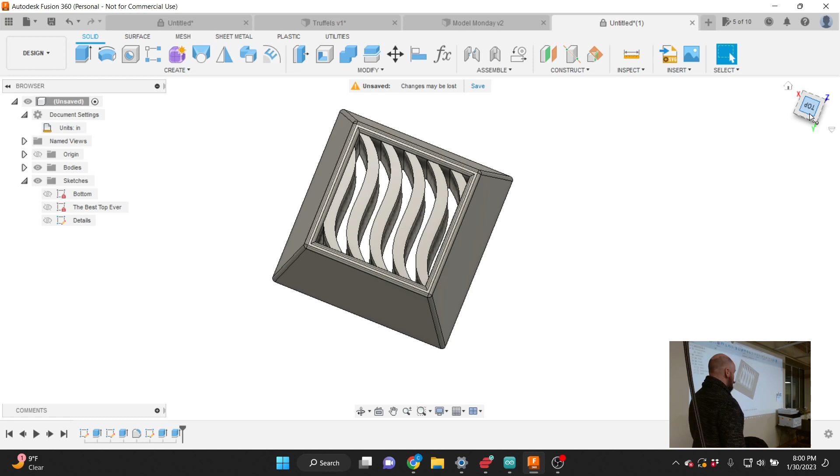I've gone through this join process and okay does not come up, so obviously I haven't done something right yet. You haven't given it a dimension—a dimension distance, being how high you want to extrude that bit up. So like 0.01 or 0.02. There you go, and now you can say okay.

Nice. And then how do I go back to see the waves actually? Just use your navigation cube, you can twist and turn that around. There you go. Okay, yeah.

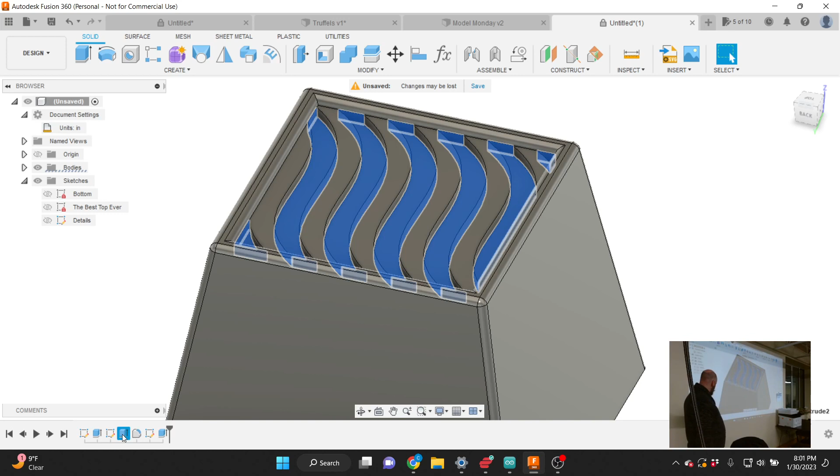Now if any of those you wanted to change, you could—let's say if I'm looking at my chocolate now and I go, oh, I kind of wish my recess wasn't quite as deep, or was a little bit deeper. This is the extrude where we made our little recess, so I could right click on it and say edit feature. Now I've gone back in time to where I was making that extrusion, and I could make it shallower if I wanted to. Let's go with 0.25.

Now my extrudes come up maybe a little high in my little waves, so this very last extrusion I made here, I could right click on it, say edit feature, and change that distance to something smaller if I wanted to. So you can do some tweaking after the fact using these features down in the timeline.

Cool. Now all of your girlfriends will be happy, and don't tell any of your wives that I told you how to do this. Those are my Valentine's Day infidelity jokes, because infidelity jokes on Valentine's Day are always funny. No, apparently not. Okay good. All right, we'll see you next week. Thank you. Thank you so much. Yeah.